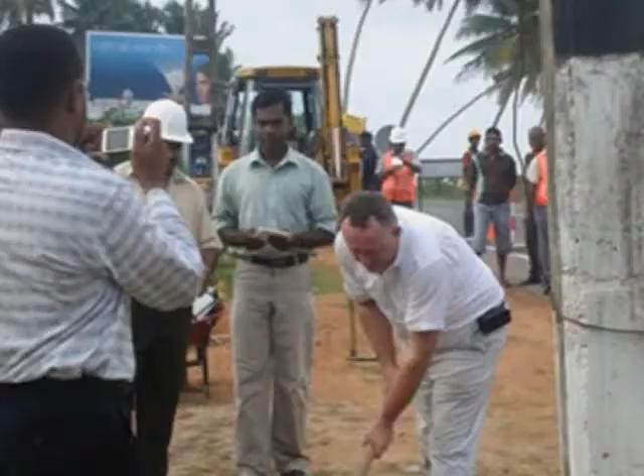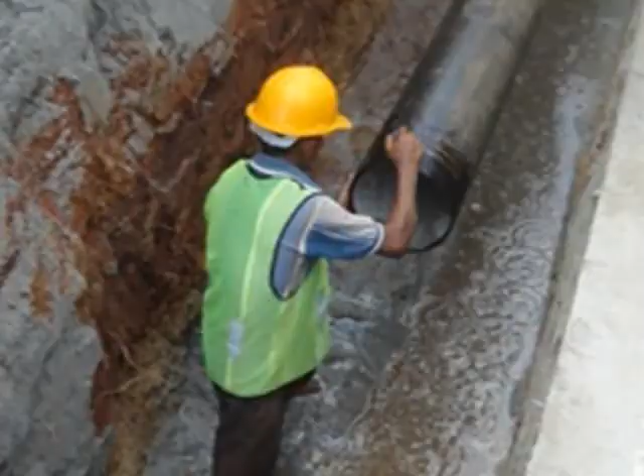636.1 million rupees. The construction works were carried out by KDA Weerasinghe and Company Private Limited under the contract agreement with the National Water Supply and Drainage Board. The works were being implemented as part of the Water Supply Galle District Project, Immediate Measures to Tsunami-Affected Areas Phase 2. The project proposed to improve water supply facilities, reservoirs, transmission and distribution to the southern tsunami-affected coastal areas between

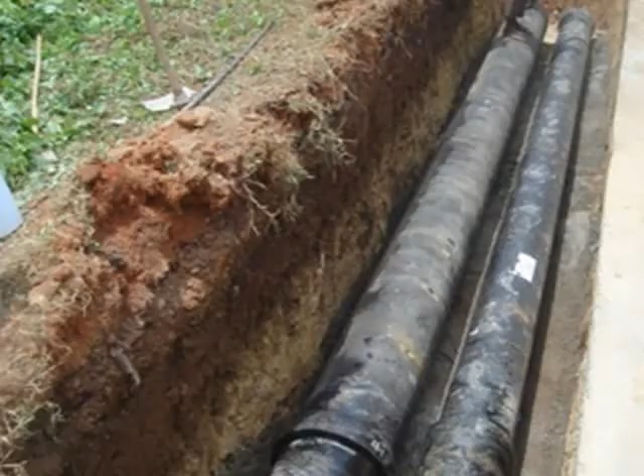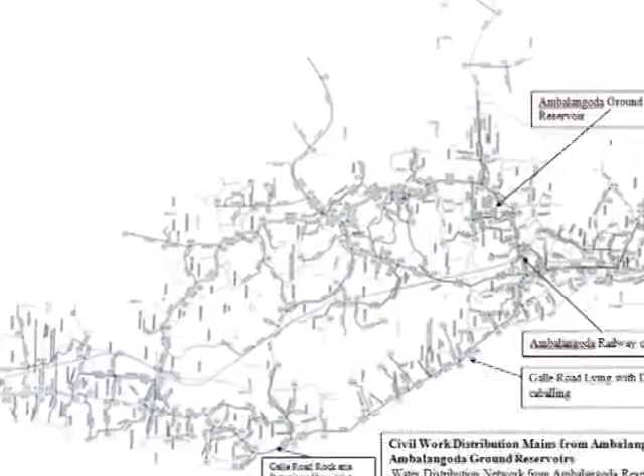Benthota and Hikkaduwa, rehabilitate and extend the existing Baddegama water supply plant to 36,000 cubic meters per day, and rehabilitate water supply distribution in Galle. The project area extends for 60 kilometers along the southwest coast, Benthota to Galle city. The project has focused on the area that is located in the flat, built-up coastal strip along the coast between Hikkaduwa, Kahawa, Galagoda, Meetiyagoda resettlement area, Ambalangoda, Balapitiya and Piyagama.

The total initial contract price was Rs 606,250,449.30, including tax, and the original contract period was 18 months. Pöyry Environment GmbH, in collaboration with Seawater Consultants Private Limited, was employed by the employer NWSDB as the engineer for the project.

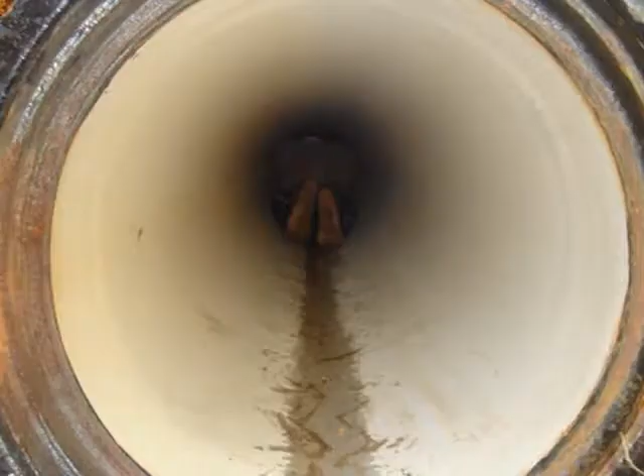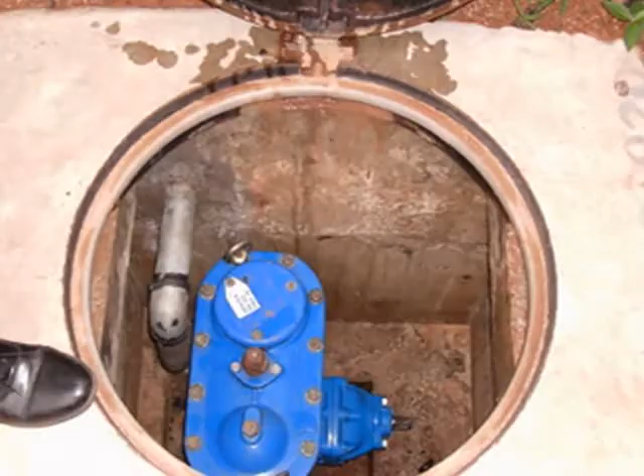Scope of work: laying of approximately 29,400 meters of predominantly 250 millimeters to 600 millimeters nominal diameter ductile iron water supply transmission from Ambalangoda ground reservoir to Kosgoda and major distribution pipes, and 79,500 meters of 90 mm to 280 mm diameter UPVC distribution pipes in Ambalangoda, Balapitiya and Piyagama area, together with valve boxes, flow meter chambers, connections, bridge crossings and all local materials, labor, supervision staff, equipment and plants necessary for completion and functioning of the works.

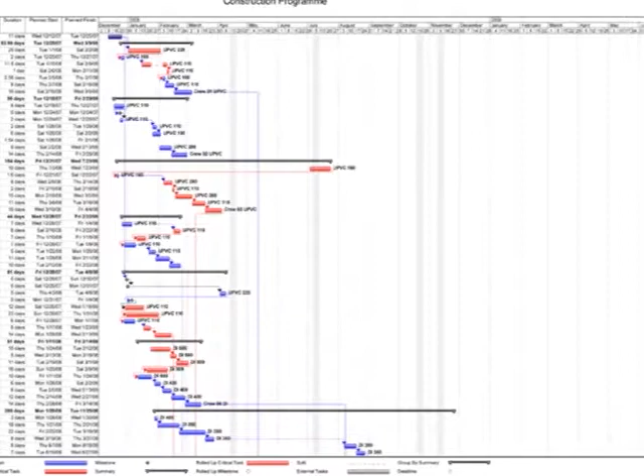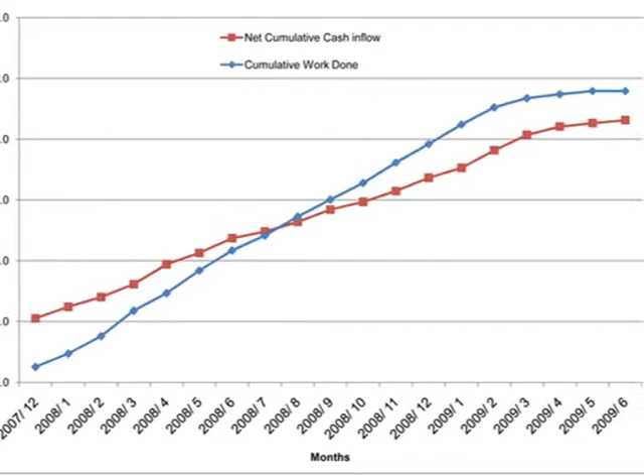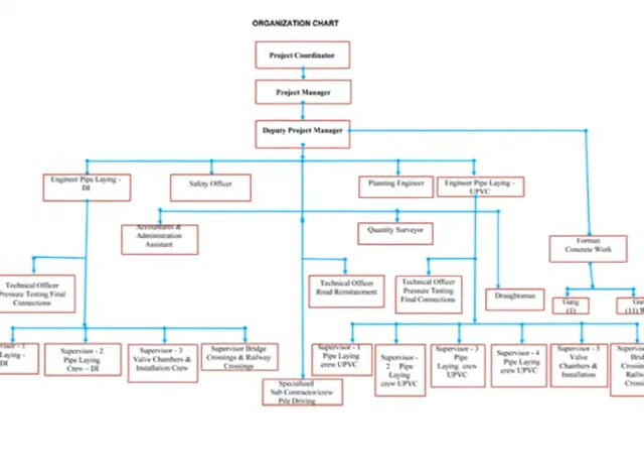Planning and scheduling. The detailed construction program was developed by the project manager and project coordinator in liaison with the head office planning division. The project manager ensured that progress of work was maintained as per master program whilst adhering to the cash flow forecast. Site organization. The project manager oversaw the management of all on-site operations, whilst the project coordinator from the head office oversaw project progress, identified key issues through regular site visits and offered logistical support from the head office.

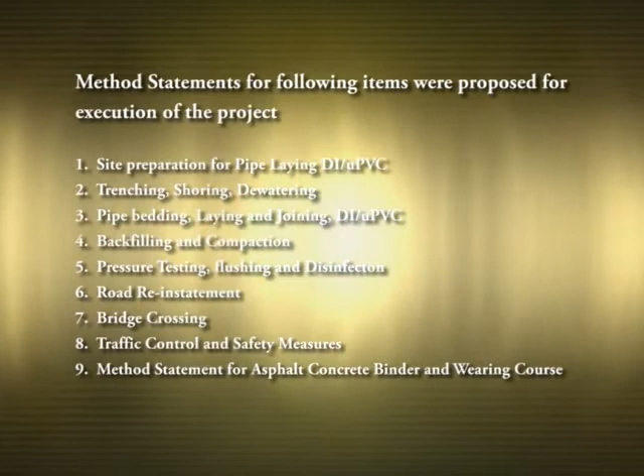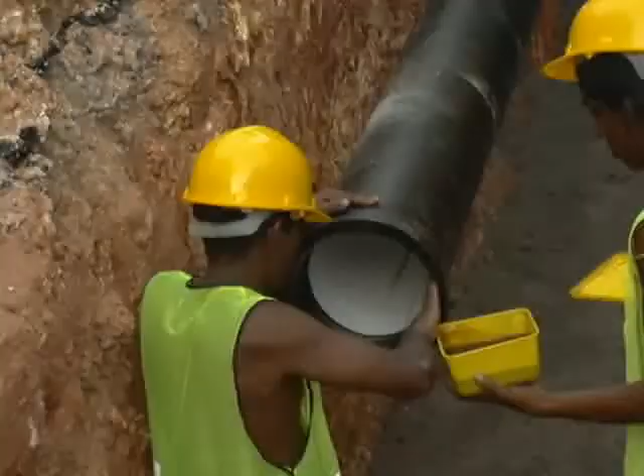Construction features. Method statements for the following items were proposed for execution of the project. Site preparation for pipe laying, DI, UPVC. Trenching, shoring, dewatering. Pipe bedding, laying and joining, DI, UPVC. Backfilling and compaction. Pressure testing, flushing and disinfection. Road reinstatement. Bridge crossing. Traffic control and safety measures. Method statement for asphalt concrete binder and wearing course. After obtaining approval for the method statements by the employer, field trials were conducted as per the approval. After obtaining the approval to proceed, construction was commenced.

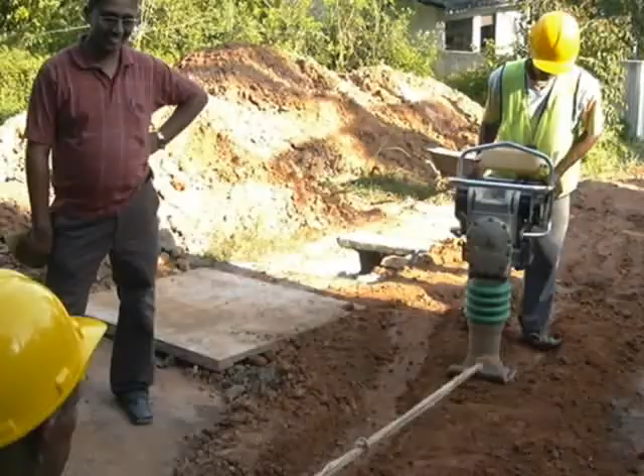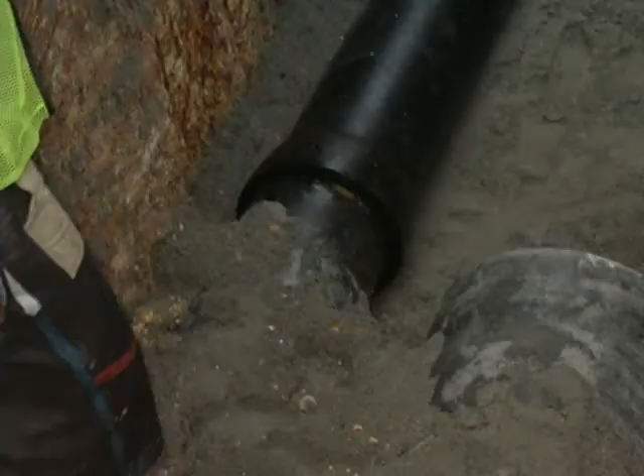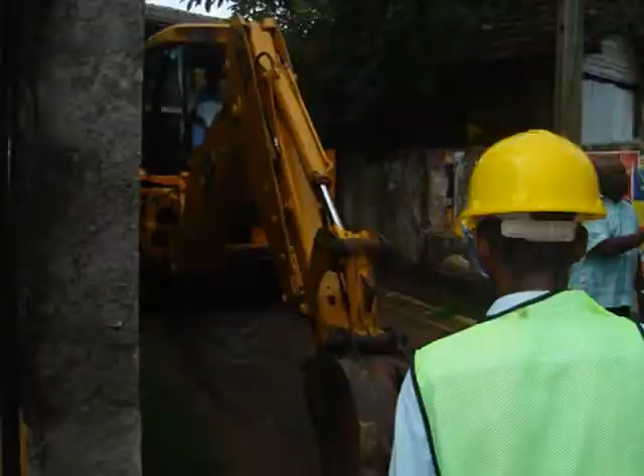The pipe laying was done with 250 mm to 600 mm nominal diameter ductile iron pipes in order to connect the gravity transmission main from the Ambalangoda reservoir to the pump house located in Watugedara Road at Ambalangoda and pumping into Kosgoda reservoir. At least 500-meter length of pipe laying was carried out prior to pressure testing. During pipeline laying, deep excavation reaching 4 meters had to be carried out. A blasting material permit was obtained since rock blasting had to be carried out due to the presence of large rock boulders in some of the pipe laying routes. When deemed necessary, shoring was carried out in certain trenches for pipe laying.

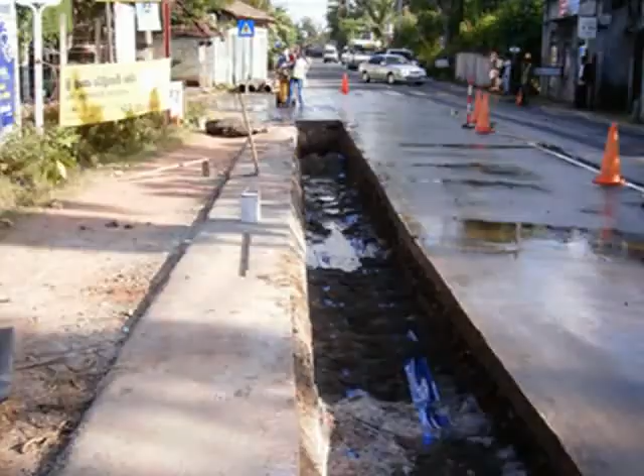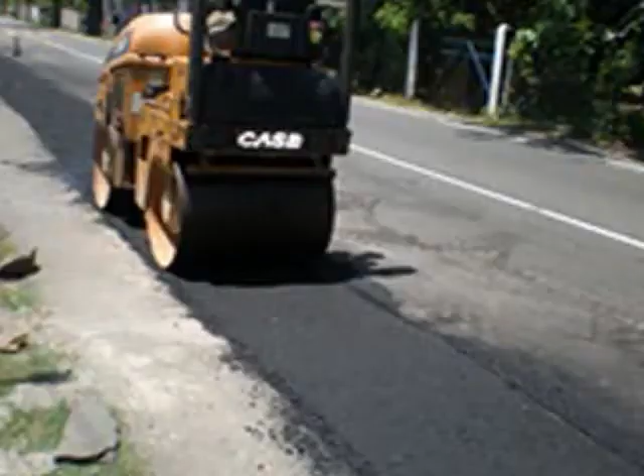All bridge crossings were designed by KDAW and obtained approval for execution works. The permanent road reinstatement of approximately 48 kilometers in Galle Road, that's Ambalangoda to Kosgoda, Balapitiya Watugedara Road, and Elpitiya Ambalangoda Road was carried out using asphalt concrete layer 40 mm in thickness at a value of 32.6 million rupees. Strict adherence to specifications and all aspects of quality was observed during trench excavation, backfilling, soil compaction and reinstatement.

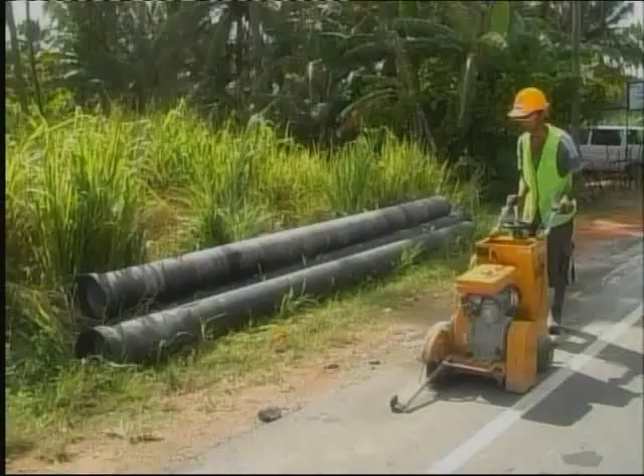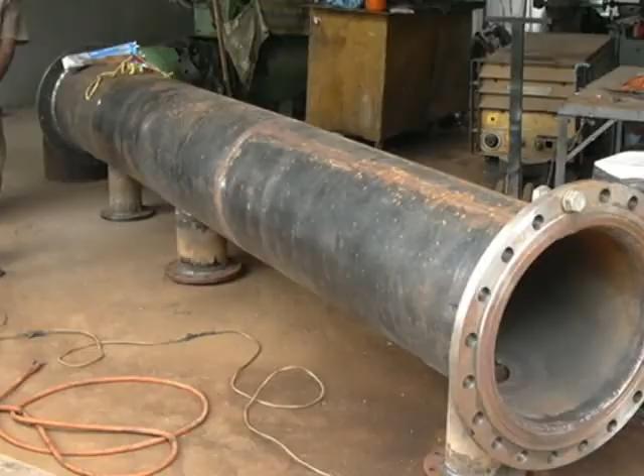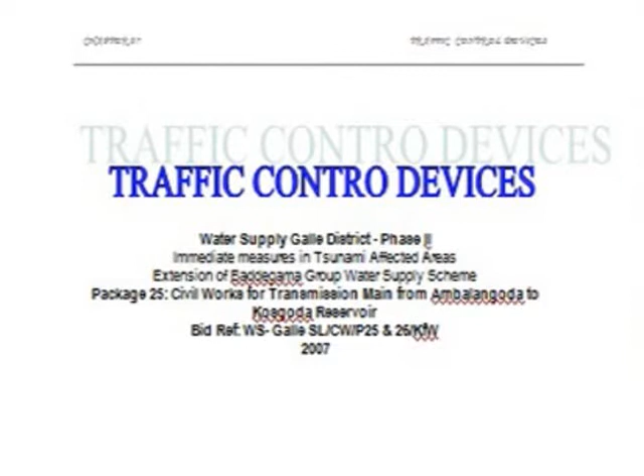Material supply. Strict product conformity was ensured in all areas of supply. All DI and UPVC pipes, gate and air valves, fittings and other items for this project were sourced through manufacturers pre-approved during the bidding stage of the project. Special care was taken during the storage of pipes to avoid stolen goods and dangerous material being hidden inside the pipes. Safety and environment management. Stringent safety measures were taken at all times. All pipe laying teams adhered to the manual of traffic control devices published by the RDA. The pipe laying teams ensured that no trenches were kept open and that soil was dumped at approved dumping yards.

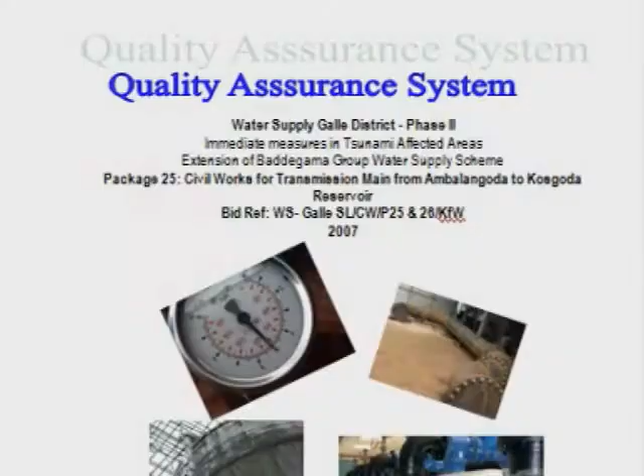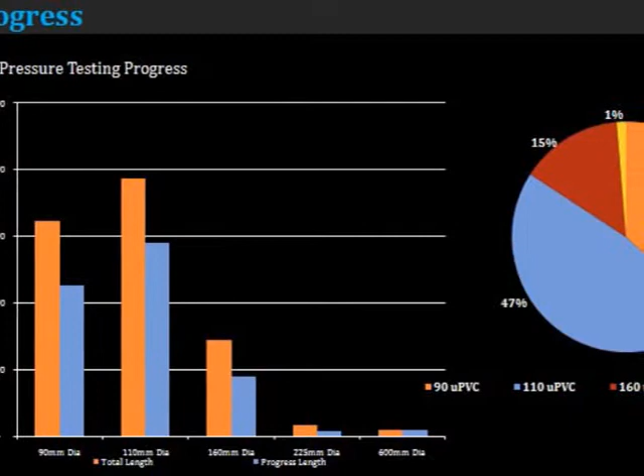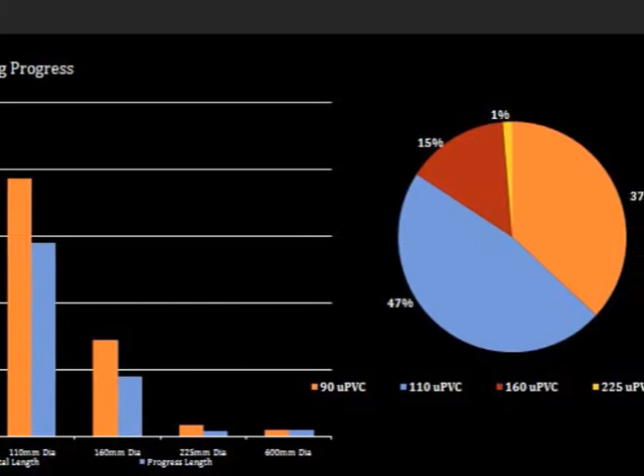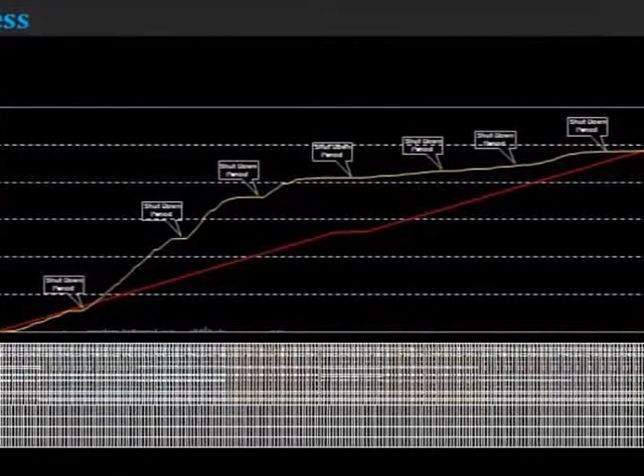Quality assurance. Since this was a quality assurance based contract, our project quality assurance in charge had the responsibility of maintaining, controlling and assuring quality. This was achieved by implementing the approved project quality assurance manual and doing tests pertaining to pipe laying such as pressure tests, flushing and disinfection tests and chlorination tests. Progress and review management. Daily, weekly and monthly construction programs were followed and the progress of entire construction activities was monitored by project management and the planning and monitoring division of the company separately.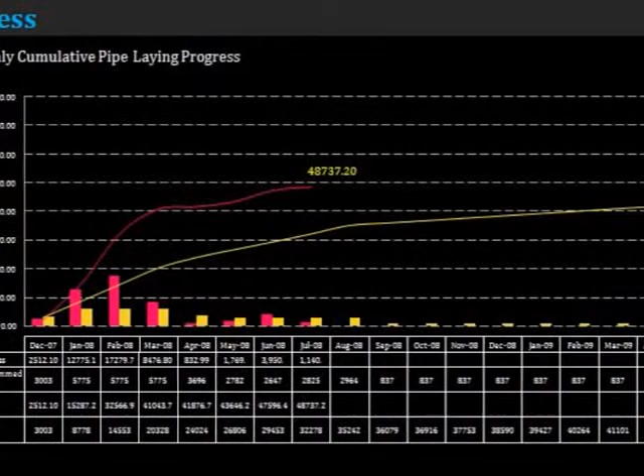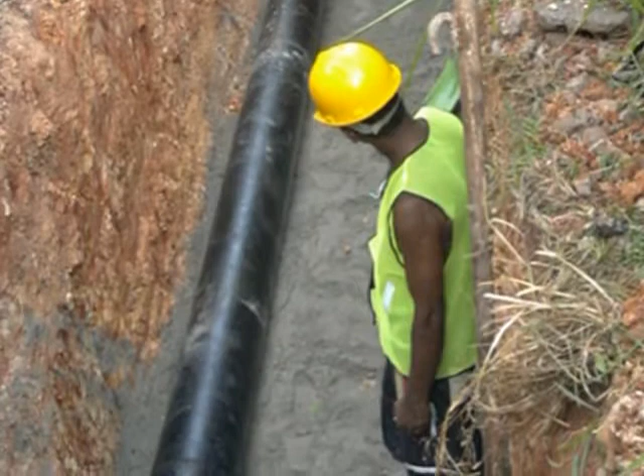Challenges faced. One of the major challenges was the execution of the pipe laying work along the busy and narrow roads within the project area. So, extra safety precautions had to be taken during works carried out in such areas. Another major challenge was the scarcity of such a large quantity of river sand for backfilling works. So, we introduced backfilling of pipe trenches with locally available pit sand in place of river sand, which needed to be transported from far away under government restrictions or regulations at the time of execution of the project.

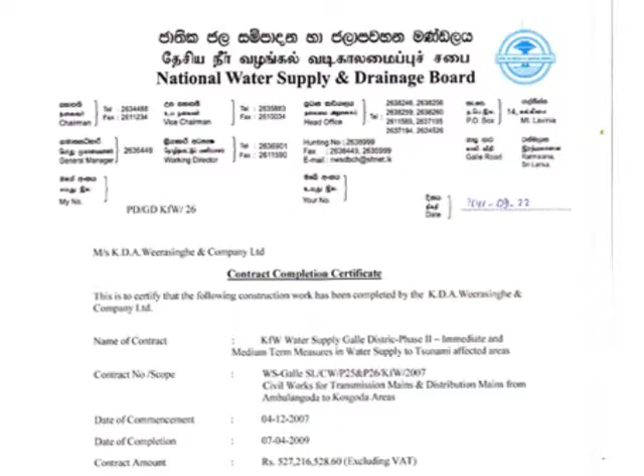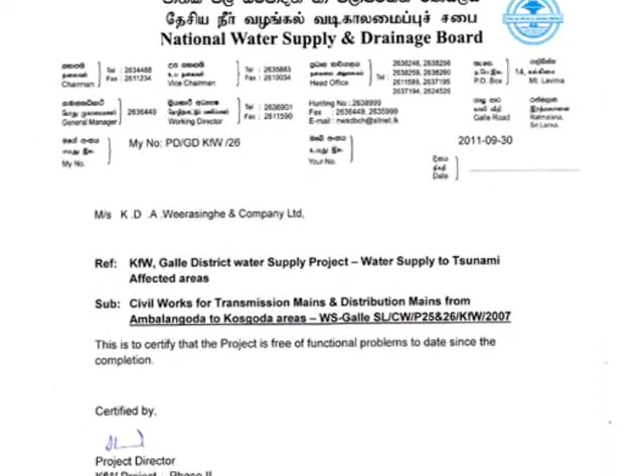Completion. Amidst these challenges, the project was successfully completed and handed over to the National Water Supply and Drainage Board on the 7th of April 2009, 2 months ahead of the original schedule, at a final cost of 636.1 million rupees.